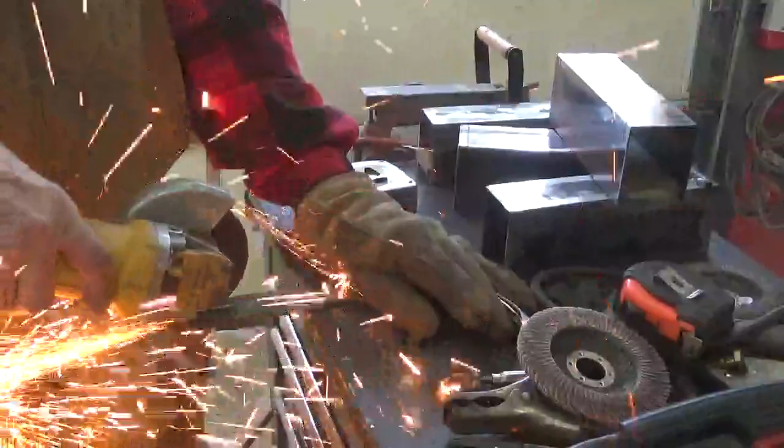I'm working on another set of bevel siding jigs, which is coming out good. Making the key for it now with this. I sent away for some more parts for the toe board because I need some smaller nuts and stuff, and the only nuts I had for the Acme screw were couplings, so I needed to send away for some stuff.

I bought it at, what's the name of that joint in New Jersey, McMaster. Yeah, I bought the stuff at McMaster, so it should be here definitely by tomorrow. I ordered it like 2 o'clock this morning when I was thinking about what I wanted to do today. So I gotta wait for that stuff to come, and then I can start putting the toe board together.

I got a really nice design going here, guys. A little help from the internet and stuff. Some comments and all are helping. So once I start putting that together, I'll be able to make a better video about that stuff. But for now, I've got to get these things done today.

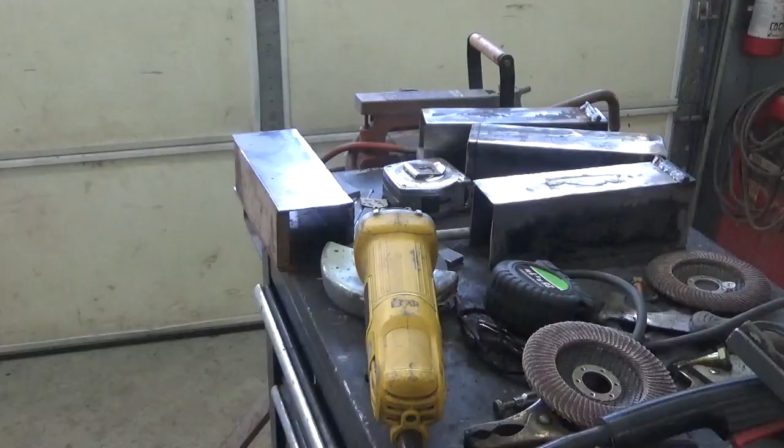Hey YouTube, while I'm thinking about it, I just want to say thanks to David from Oklahoma. This is a wire gauge, for sheet metal and that. I make things like this for lumber, like a ½ inch and all the way up. But when it comes to the smaller things, I don't have end mills that are that small to be able to make these little tiny cuts in here.

And I really appreciate this. It's something you can put on your keyring actually, but I'll keep it in my drawer. I've already used it twice since I got it, and I just got it yesterday in the mail, so it's pretty neat. So David, I thank you for that. And Carmine's not getting it.

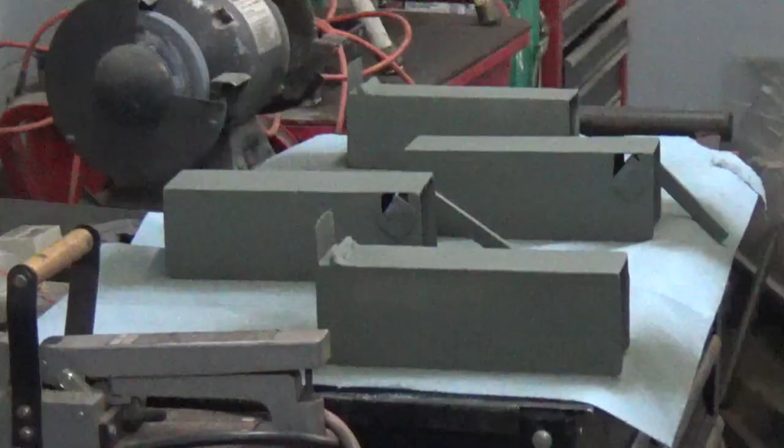Well guys, not a lot going on today. I was working on that set of bevel siding cutters. All I have to do is paint them now, and then I'll be able to ship them the following day. So, let's see, it's Tuesday, probably Thursday I'll be sending them out. I brought my stuff back in the garage. I left it out last night and it snowed, and I don't want it to get snowed up.

So anyway, really cold day today. I don't think the temperature went much above probably 10, I guess. So it's quitting time for me. Time for supper.

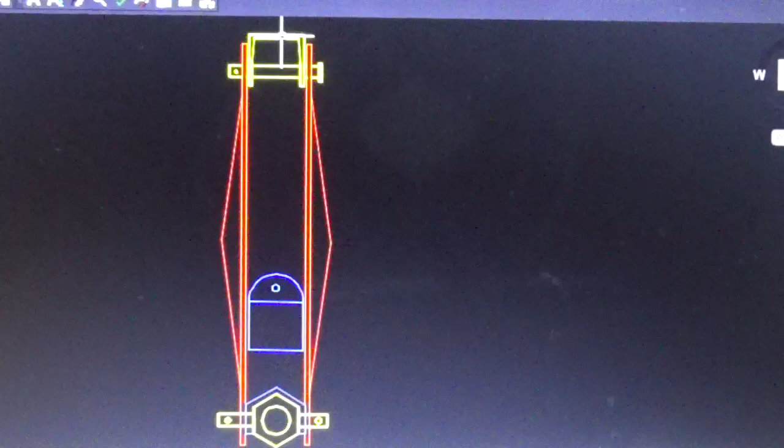Hey YouTube. So I had gotten some questions relating to the design of the toe board. What I wanted to show you guys is that this is a section view of the toe board that I'm building. The log would be resting on this piece of channel here. What I want to do is put a pin in here, 2 pins, one on this one.

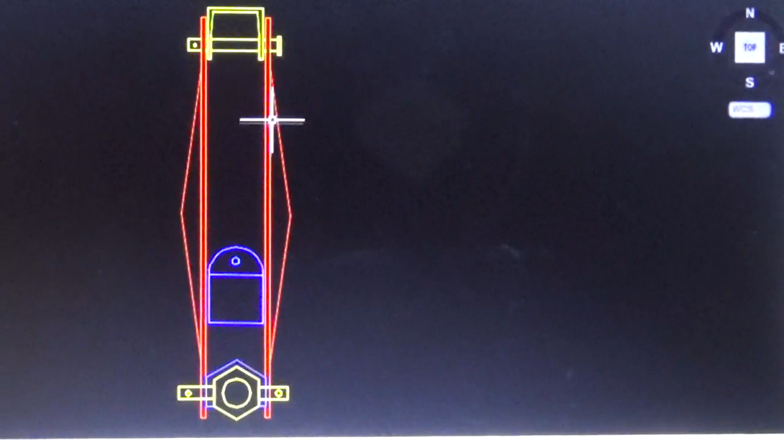There's 2 pieces of steel here that are uprights, 2 here, and then there's 2 behind these. So I want to put pins in there that can be easily taken apart. And I was asked about the lateral movement of this thing. Well, here it is. The bottom of this is going to be fastened to the bunk frame.

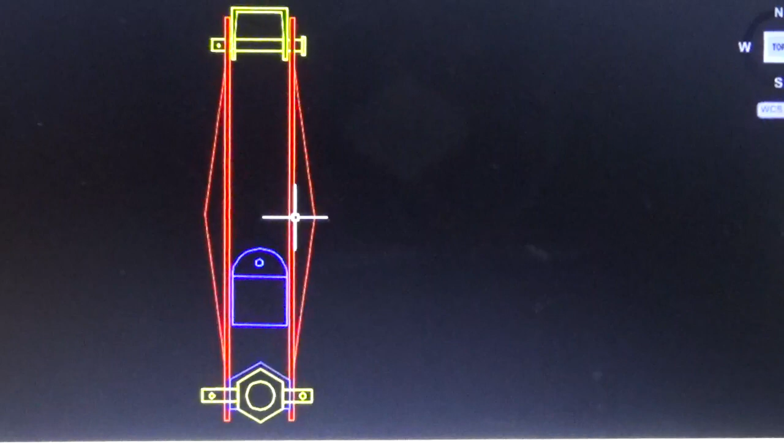Okay, this is a piece of either channel or tubing that's going to run between the 2 uprights from one frame to the opposite side frame. That'll stop totally any kind of side movement, maybe vibration or slack in the pins, but that's about it.

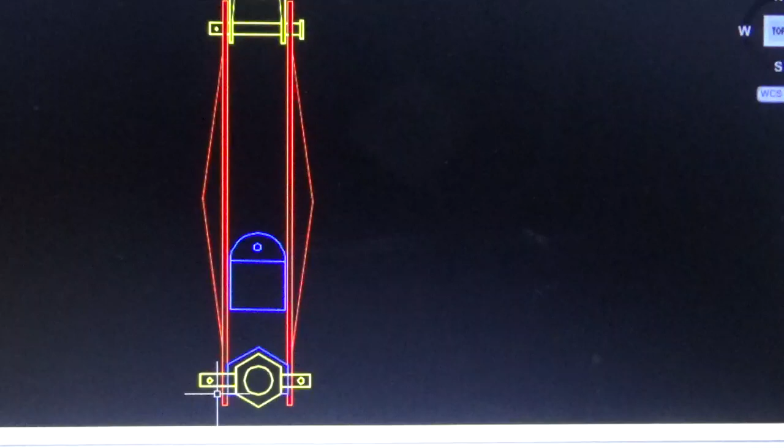I also want to put pins and R-clips down here. I was talking about putting bolts in here possibly, or welding nuts on here. I decided that if I put pins and R-clips in here, it would be a whole lot easier to take these side pieces off. This line here, just so you know, was just a thought of a brace for this steel, but I've got some pretty heavy duty steel and I don't think I'll need the bracing.

But anyway, that's how I'm going to be doing that. So then when we look over here, this circle represents a log. This entire thing, it's about 4 inches or so from each edge, would be able to support some sort of log when it's in the upright position.

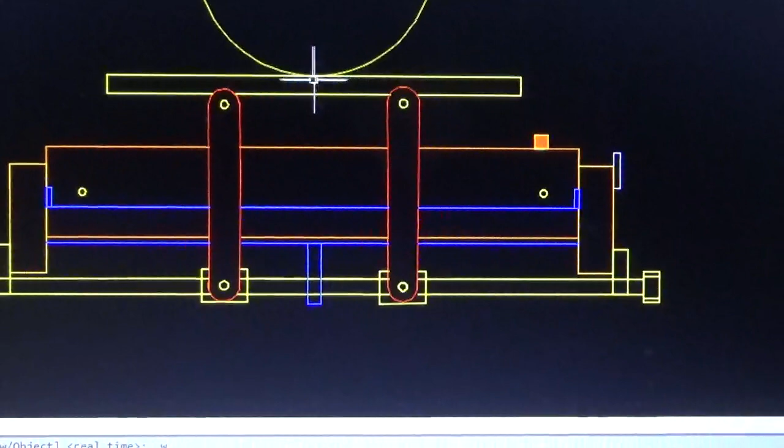And I'm looking to get from the top of the bunk frame to the top of the toe board a minimum of 4 inches. It looks like I will get that. What designates how high that can go is the distance from here to the frame. Because when this nut stops at this point, that's what allows for this toe board to move further up or down.

So all I wanted to do is be able to get at least an inch below the bunk rail. It doesn't even have to be an inch, just so it's slightly below it, and then be able to take it up about 4 inches. That should cover anything. Now you can see here the blue line. This shows that beam or steel member that I'm not sure what it's going to be out of yet, running between these 2 uprights and the 2 that would be on the opposite side. And again, that's going to take care of the lateral support.

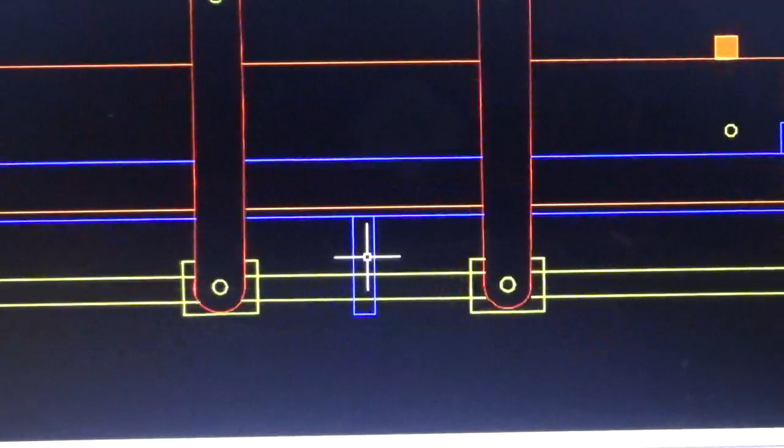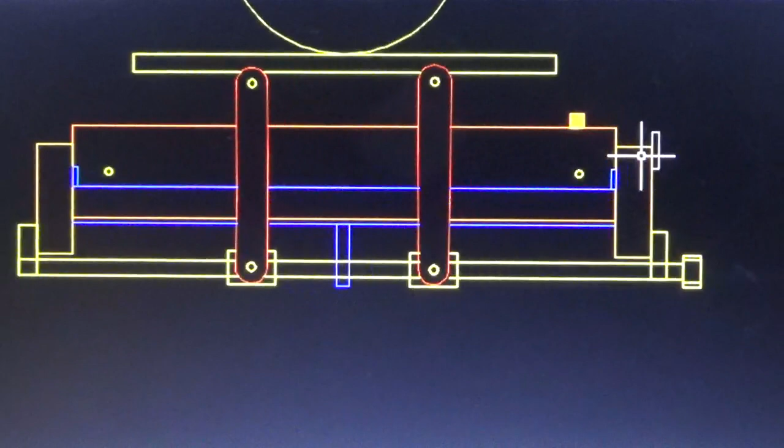Now this blue line down in here, I'm thinking about this. I want to be able to support the Acme screw in 3 positions. On this end, and then in the middle. So what you're looking at here is a 2x6. Let me just back up a little bit. This is the 2x6 rails on the Wood-Mizer. This would be the bunk frame, the actual bunk rail, and then the other 2x6 rail on the opposite side.

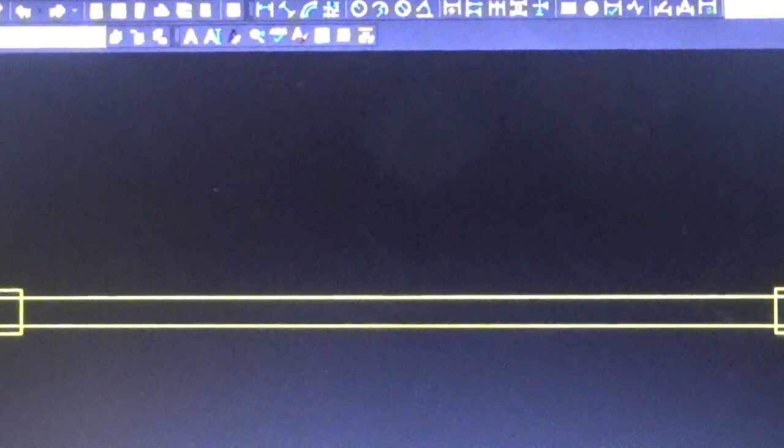So you're looking at a section view of the sawmill, but this over here is actually a section view of the toe board itself. So anyway, right now I'm waiting for a couple of things. I have a little extra here. Now this would be the Acme screw for the toe board. The way I want to do this is, this represents the frame of the Wood-Mizer, these 2 squares. I didn't get a chance to color code them yet.

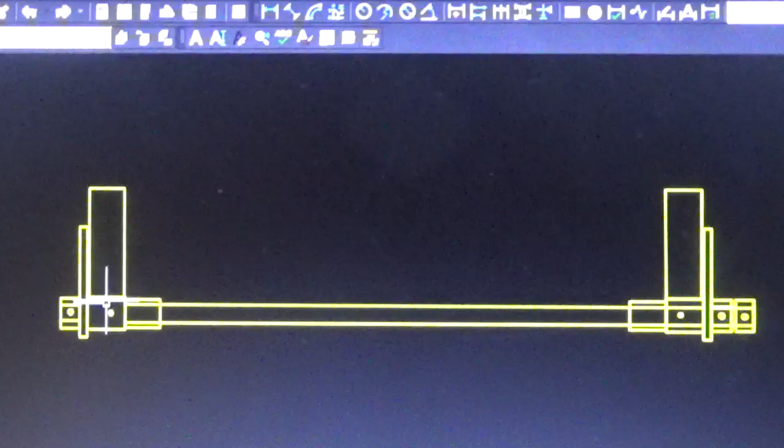But I want to be able to come down here with a plate, which you already saw that I have. I want to weld a tube onto that that's going to come underneath this 2x6, and that's where the axle will ride, in here. A nut on the end of that, with a set screw or something to hold it on. I want to be able to put a grease fitting in there if I can, or if not a fitting, at least a hole that we can squirt oil into. And then this would be the nut, or the coupling, that rides back and forth and moves the uprights into the straight perpendicular position.

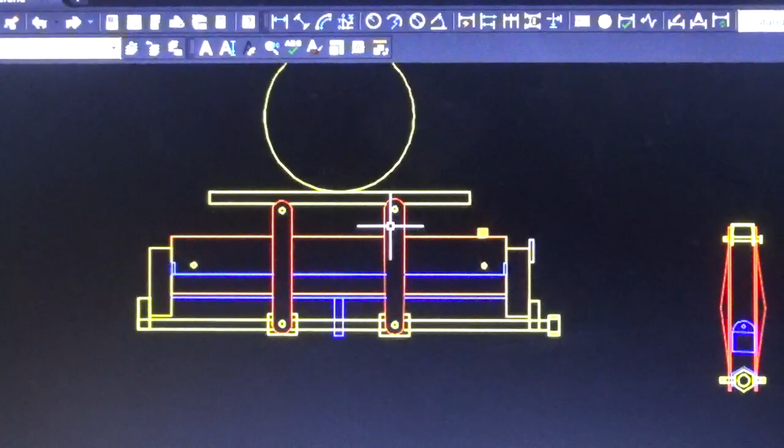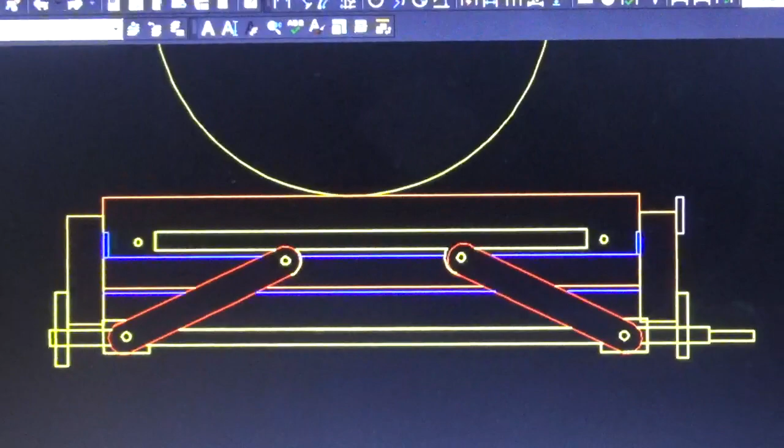So I ordered some stuff. This is what it looks like in the lowered position. I needed a couple nuts and stuff for the Acme screw, so I ordered those, and I should be getting them either tomorrow or the next day. But either way, then I'll be working on this thing a little more intensely. Right now I was working on some bevel siding cutters today, so I didn't really get a chance to work on this. But anyhow, that's what it's going to look like when it's done.

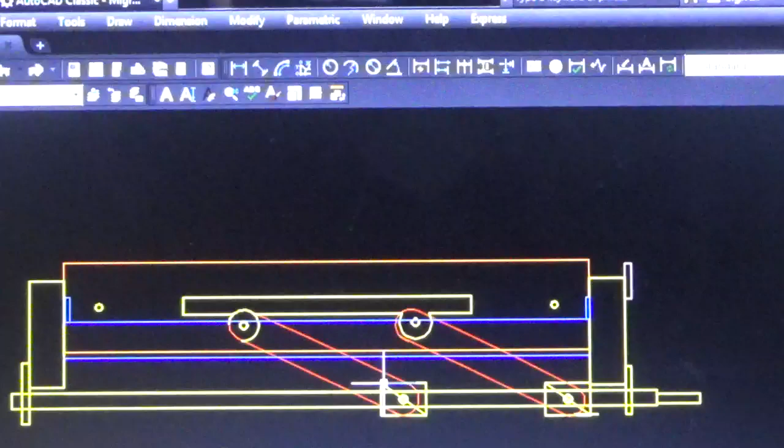And I just wanted to show you this also. This is another way of doing this. If you were to use a right hand Acme screw, you could actually make this work like this. I just don't like the fact that there's no real leverage pushing up on this, from here all the way out to here. I like the idea of coming in from both sides. I think it gives you a greater strength.

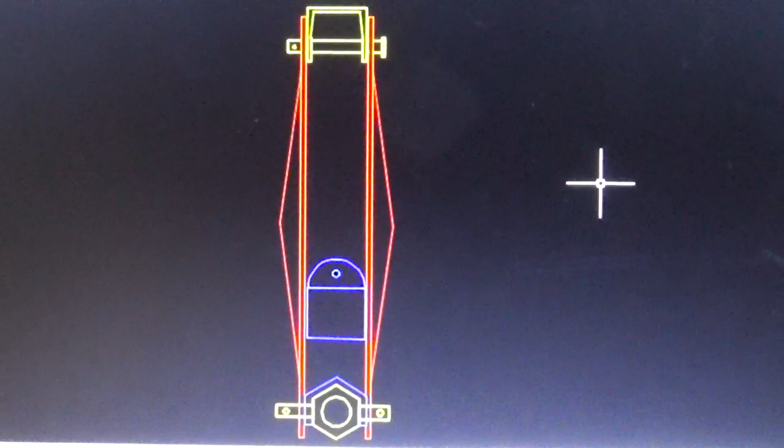So, alright guys, well that's where I'm at so far with this thing. Like I say, I think it'll turn out pretty well. There again, that's the cross section of the actual toe board itself. But it'll be a couple more days until I actually start getting something together. So probably tomorrow, when I make tomorrow's video, I might be able to cut out some of the pieces that I need for this thing. So I'll let you know how I make out tomorrow then.